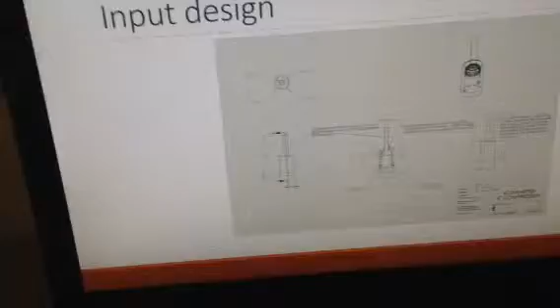Now, for the input design, one change we had to make was the inner diameter of the piston chamber. It was originally 10 inches, but the problem with that is we couldn't find a standard size rubber O-ring. Therefore, our manufacturer requested us to reduce our piston to a smaller diameter, so we changed it to 5 inches diameter, but that should be no problem, and it can still deliver the desired pressure we need.

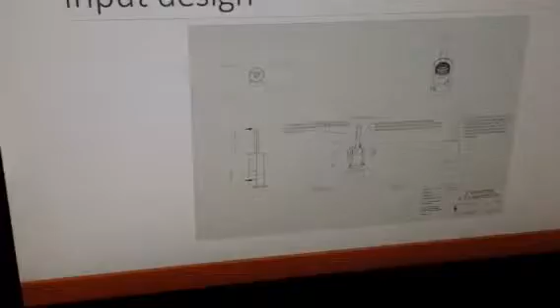Another change we made is with the top. Since the piston chamber is a cylinder, we are going to need to cut off part of the top, and then bolt the top part into the sidewalls. Bolting it into the sidewalls should be no problem because the walls around our piston chamber are all an inch thick.

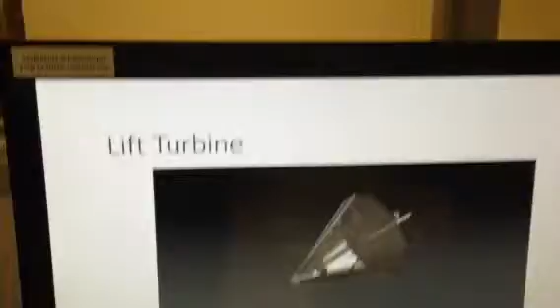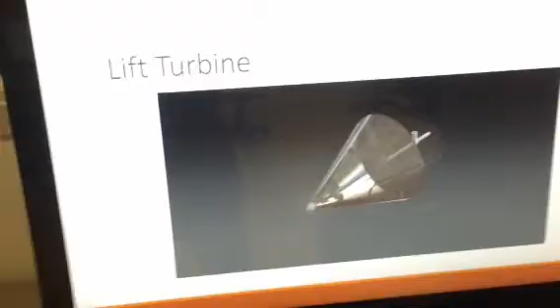Now, this is our newly designed lift turbine, and what we have over here is the wind lens to help guide the stream of airflow coming out of our storage tank. This is just a picture of one of the individual blades. The blade is a NACA 63215, and the purpose of constructing a lift turbine is because in our calculations we have found that this produces a greater coefficient of lift.

But for our testing purposes, we will be building both the drag and the lift turbine, and then we are going to compare the data to see which one delivers the most power.

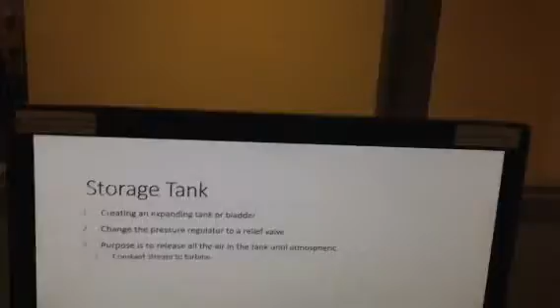Now, the new idea for the storage tank. First let me talk about our original idea. Our original storage tank was going to be a solid rigid tank. But the problem with this is we want to implement a relief valve. Let's say hypothetically we set the relief valve to 100 psi, and we're building up that pressure from the impulses of our piston from cars driving over the speed bump. Once it reaches 100 psi, the relief valve would open up and release pressure, but as soon as it drops below the 100 psi mark, the relief valve would be closed again.

That does not fit our application. What we desire is that as soon as the relief valve opens up, we want a constant stream, and we want the storage tank to go from the pressure we set to atmospheric pressure. So what we have decided on is building a bladder or an expanding tank. The purpose of this is that as the impulses go over the speed bump, the pressure is increased, but since the tank is expanding, the volume increases, therefore the pressure isn't really increasing as much.

But as soon as the tank has expanded to its maximum expansion, the relief valve would open up, letting a constant stream be delivered to the turbine. And since the tank is now closing back up, it will increase pressure to continue the airstream being delivered to the turbine.

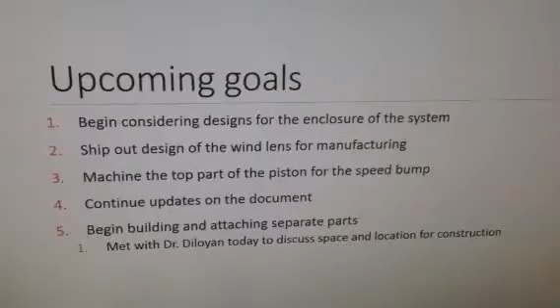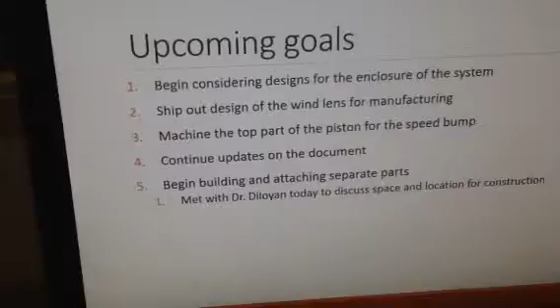And now a couple upcoming goals. My team and I will be working on figuring out how to enclose our whole system and building supports for the fluid conduits and the storage tank, etc. Also, we have the wind lens for the lift turbine completely designed, so we will be sending it out to begin manufacturing and machining it.

We also need to begin machining the top part of the speed bump, the physical speed bump portion of it. And we will continue updating the document. One thing I would like to mention is we spoke with Dr. Diloyan today. He gave us some very great advice, and on top of that, we discussed spacing and where we can physically build our device.